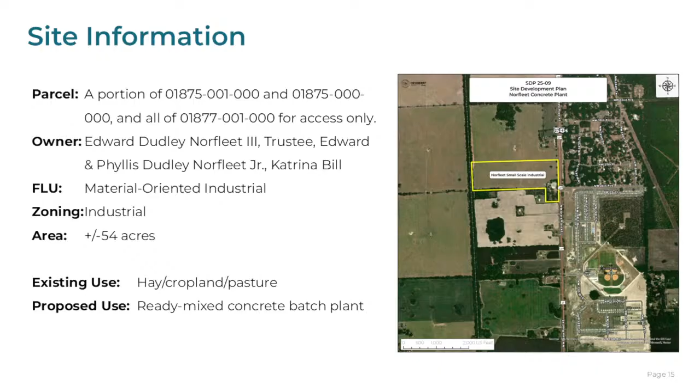This is the proposed site and development plan, where you can see they're accessing the site on an existing driveway from US 27/41. And that's in the FDOT right of way, so future permitting and possibly requirements from FDOT will be forthcoming. In discussions on this project, aligning it with 24th Avenue was a no-go per the engineer of record.

Because of misalignment of those and the existing building preventing a road from being constructed in that particular area. And the separation between existing driveways may not be possible, given they were going to be so close to each other.

Here's a close-up of the actual operation of the property. I just want to go back to this one real quick. You can see that there's a future subdivision that is proposed for the area that'll be forthcoming in the form of a plat, but at this time, we're not requiring platting for them to proceed with the site plan.

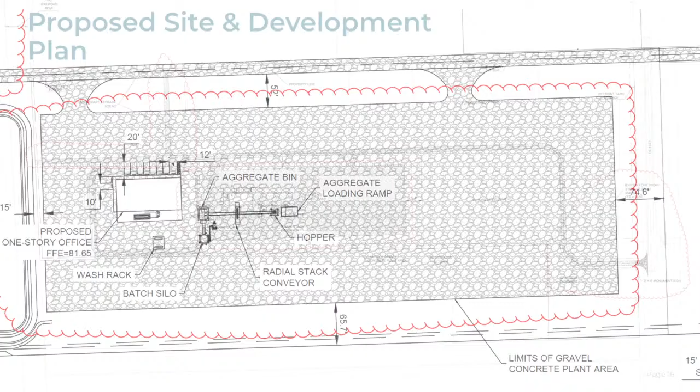So very remarkably similar, the vehicles will come in, they will fill up. There's a drainage pit, there's an aggregate area I want to show on this one to the northwest, which is going to be pretty open, kind of similar or remarkably similar to the Watson property in 41 Commerce right now, where there'll be aggregate openly stored.

The site is all gravel, including the road. There's a condition that addresses this. That interior access road should be a paved road, but because they're anticipating water and sewer becoming available to the site soon, we've just pushed off that requirement to a later time when they have an opportunity to install those water and wastewater lines, so they're not paving and then demoing and then paving again. As a matter of sequence of construction, it just is more affordable and logical.

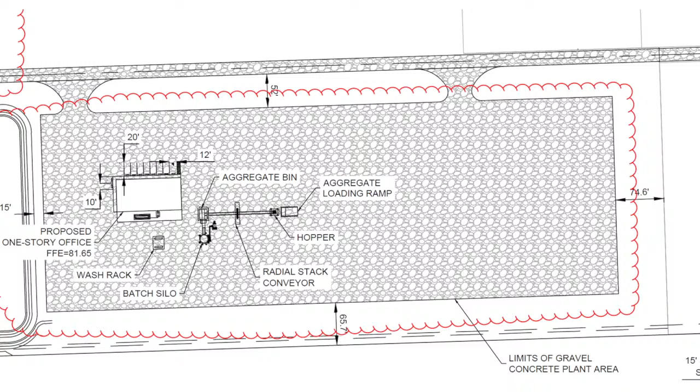Just wanted to show the existing driveway and some of the turning movements that were occurring there. And you can see some of the right-ins, the right-outs potentially, and then the passive lefts that would be occurring in that particular area could lead to a little confusion. We'll lean on FDOT District 2 to work out any bugs that they see in their right-of-way as far as traffic goes. Staff did find it consistent with the comprehensive plan, land development regulations, and the approved special use permit.

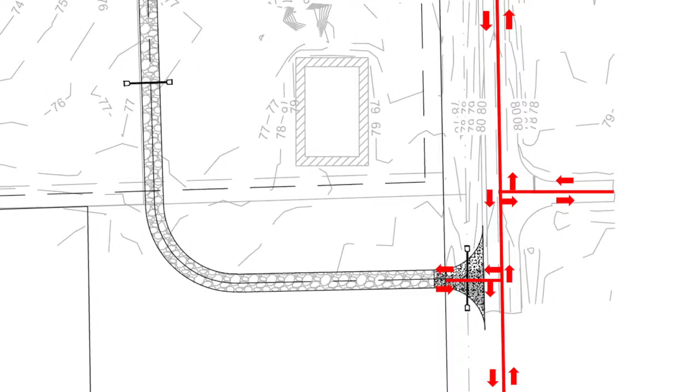We are recommending approval with the conditions you see on the screen here. I'm available for any questions. If you have any, the applicant hasn't prepared a presentation. They are here as well to answer any questions you may have. Thank you. Okay, the applicant does not have one? Is that what you said? Okay, all right, very good.

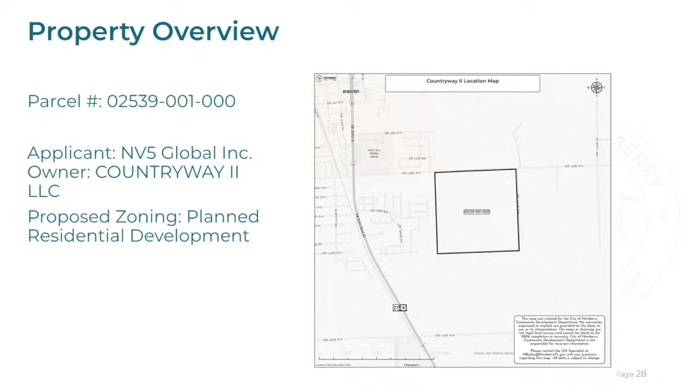Staff finds this petition is consistent with the comp plan and land development regulations. Overview of the request: it's a rezoning from agricultural to planned residential development. The property is generally located at the southwest corner of Southwest 15th Avenue and Southwest 234th Terrace, about a half mile east of State Road 45. Here's the general area, and that's the parcel number. The applicant is NV5, owner is Countryway 2 LLC. The proposed zoning is planned residential development, and the current zoning is agricultural.

Again, the question to consider is whether the petition is consistent with the city's comprehensive plan and land development regulations. If yes, the PZB could approve the petition. If no, deny the petition, or you could continue to a date and time certain if more information is required. The applicant is here to present also.

Okay, Chris, you presenting? Oh, Jerry. Oh, you're in NV5, that's right. Okay, I'll see if I can make this work. Okay, that's how I get the pointer. All right, I'll take my cues from JP.

Good evening, Mr. Mayor, members of the Planning and Zoning Board, Madam Attorney, Mr. Manager. My name is Gerry Dedenbach. I am an AICP certified planner, have been for about 30 years now, and I am here to present a quasi-judicial item, the rezoning of what we're calling Countryway 2.

As you can see in the aerial on the screen, this is the quarter section immediately to the east of Countryway. There are some good tree lines here which influence our design, which you'll see brought forward into the PD master plan.

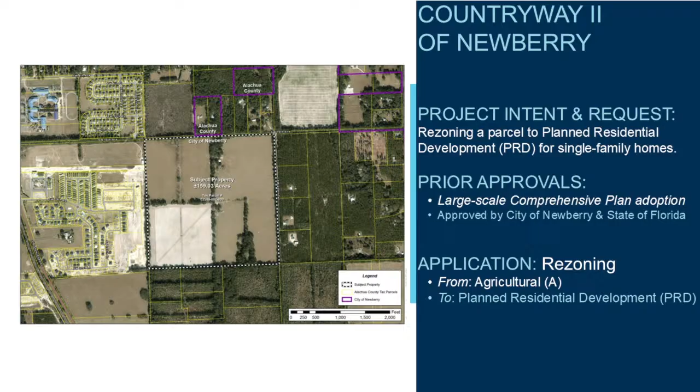That's interesting. Yeah, this just shows you nothing. There we go. Well, sort of, but that's not what's supposed to be happening. Maybe we need to reload the presentation.

Our process here, and we'll see if it gives us problems on future slides: we held a pre-application meeting in August of 2024. We submitted our applications right before Halloween, and these have been under staff review and resubmittal. We produced a traffic study, which caused a bit of delay, from October to February and then again February to April. We conducted a traffic study with a methodology approved by both the City of Newberry and the Florida Department of Transportation, because initially our primary connection is to State Road 45, 27/41 out there.

We are here tonight at the Planning and Zoning Board and anticipate hopefully going to the City Commission next month. Let's see what happens when I click further. Okay, yeah, we are having a PowerPoint meltdown here.

About 12 years to accomplish. The project will initially connect to the existing roadways, water, sewer, and utilities in Countryway. This is a logical extension of the existing development program. There's Countryway Town Center, and we will connect there. Therefore, the PD actually limits this property to a lower density than the land use allows. We did that because we want to save some tree lines and have that interconnection that works off the existing roadway network.

So this is overall master planned in the city's long-term framework. We know that they will be changing theirs. We supplied our plans to the engineers for Newberry Ridge on April 7th of last month. This is consistent with multiple elements in the future land use element, and you would see those if that was working right.

What's really striking me as odd, and I think it's in the Crestron system, because we do not have a City of Newberry logo embedded in our PowerPoint—so I think it's trying to project two things, and it's confused over what it's projecting.

The data and analysis completed with our comprehensive plan and our land development regulations, or LDR, that we've presented identifies numerous elements in the comprehensive plan that this application is consistent with. Staff has acknowledged in the staff report that each phase of this development, as presented in the petition, represents varying degrees of impact on state services. We have planned for all that, as you can see in the overall connection scheme of this project.

A development agreement will be negotiated between the city and the applicant prior to final development here. It is consistent with the zoning regulations of the City of Newberry, specifically Article 4, Section 420, and again in the zoning regulations, Section 4.2.24. So our request is that you respectfully approve this, per the staff report and our competent substantial evidence presented in both the applications, our presentation, the applicant's presentation, and the subject matter testimony provided to you this evening. And now it's back to our presentation.

You've got phase one to go through an infrastructure design, so I would think probably Q4 27, Q1 2028 to start. The phases, phase one, I feel like I'm at a seance here with this. Yes, phase, yeah, Vanna White this for you. You got to point it at what you want to advance. Oh no, I want the arrow so the mayor doesn't have to Vanna White this.

Okay, you had asked about the perimeter buffer. This is helpful. As you can see to the south here, the buffer is thicker in areas where the vegetation exists, and along that area shown on the aerials, because there are going to be stormwater basins there. So that buffer is thicker along the south side than the east side, because here we're going to dedicate 60 feet of right-of-way, so there's really no buffer, but it will be the back of lots that are there. Along the north side, I believe we have a 25-foot buffer to the right-of-way of 15th. And there is some buffer here along the western side, but also these areas are stormwater basins. So there's already buffering built in here, and there is buffer along that edge, but there's a good distance between the stormwater basins and where the tree line would be here.

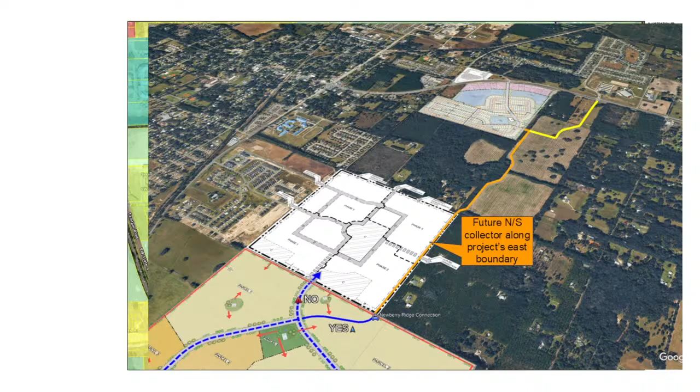Okay, with that, any comments, questions from the dais? Going to keep traffic off of 15. Hold on, you got to come up to the podium to ask any questions if you want. Okay. And any members of the board have any questions for staff or the applicant? Okay, I was going in line.

I did have a clarification question that I ran by staff and they asked me to ask as well. When I was reading through the overview, I see there's a reduced dwellings per acre of less than 4 for low density, but within the proposal there are obviously smaller homes, tiny homes. I know in the other development, Countryway 1, there's already an existing one, closer to phase 3, if I'm correct? Right here, right. So is phase 3 going to be where the proposal of additional tiny homes flows from Countryway 1 to 2? I'm trying to think of the flow here, so that it all looks synonymous. I love the mix of it, I just wanted to get an idea visually. I'm not going to hold you to it, I know the PRD isn't complete, but I wanted an idea.

Yeah, if we do the tiny homes, and I don't know if we're going to do them, it would be in that same area. That was the only reason you were asking for the shortage from 10 feet to 3 feet, correct? Right, that's the only reason. So it would be kind of continuous with it, correct.

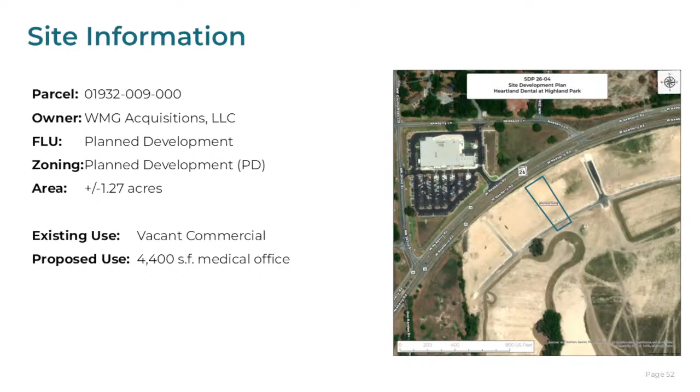Thank you. Here you can see some of the developments that have been brought before the board, as well as some of those coming tonight, and McDonald's in the future that's currently in process. In yellow is the Heartland Dental.

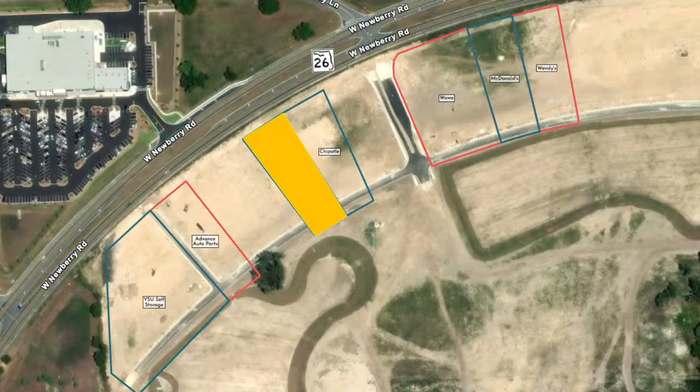All right, and here's the actual site plan. They utilize the cross-access. Heartland Dental is on the left side of this. There's a lot of call-outs on the right. Both parcels are owned by WMG Acquisitions, and so both utilize the same firm. They kind of design these sites in unison so that they could shoulder some of the ingress and egress and other requirements that sites have to do since they're a single owner currently.

Heartland Dental is on the left-hand side here, right there. They have cross-access in the front, but the primary access will be in the rear for the time being. Both of these will be built out. They do share an ingress and egress off that back service road currently, and as all the parcels fill out, the eventual cross-access across all the parcels will become universally available from the primary ingress egress drives.

Not much else on this particular site plan. Again, they will access here. They have a dumpster in the rear towards the service side of the building, and then the office building with parking all around it. It does meet the overlay standards.

The overlay standards applied in this particular case are the ones adopted by the commission initially. Given the date of this and the progress they had made up until this point, they had kind of cemented in the old overlay standards, which are still very robust when it comes to landscaping and whatnot. In the front, they'll have a 15-foot landscape buffer opposed to a 25-foot. There are certain other things added in the large-scale retail package that aren't considered here, like the limitation on building height, et cetera. So they still only need to meet the commercial intensive height requirement, which is 72 feet.

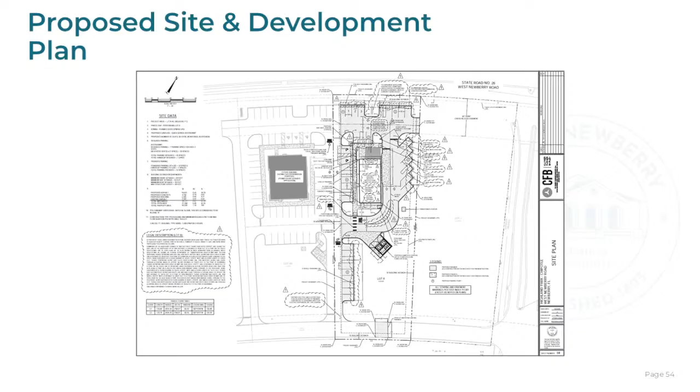It's, yeah, but this is a one-story building, so neither here nor there. We did find it consistent with the comprehensive plan and land development regulations. A KnoxBox is required for this particular use. There are some additional infrastructure callouts here that will be addressed on the building permit, but are inconsequential to the actual site layout.

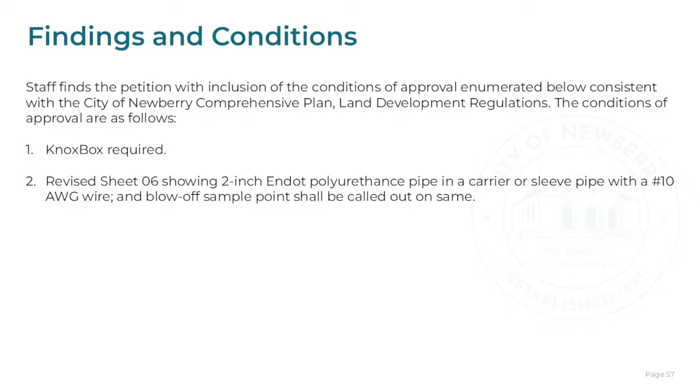One other thing I'll advise the board in case it comes up in public comment is that based on how many people are unconscious at a single time, it may change some licensing requirements with the fire department, but the fire chief gave it his blessing. It's good to go there. He was very happy with the plan. That completes my presentation. The applicant is here to answer any technical questions you may have.

Thank you guys so much. Do we have some of the elevation stuff for Heartland? For the public, we have it in the backup. I can tell you that it did satisfy the overlay standards as far as design and materials and glazing. They did provide a pretty robust design package utilizing multiple materials. They're here if anybody from the public needs to check them out. They were in our backup, but just want to make that available to you all if you need it for any reason. Everybody from the board, you saw that in the backup? Okay.

Okay. Did the applicant's not here, correct? Yes, they are. Oh, great. Hey, did you have a presentation or no? Yes, sir. You don't like us?

The only question I had was in one of the documents, there was construction staging, which I assume, since I know it's the same owner for both properties, is for both properties during that time, right? And it's going to go all green space afterwards? Yes, ma'am. Is that going to be used for the water management? Like, is it going to be a basin there?

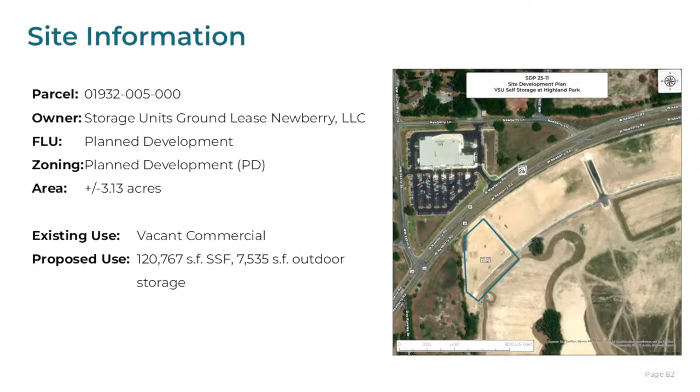The big mustard colored one is the site, so you can see its orientation within Highland Park. Here is the site plan showing the location of the buildings, the flow of traffic, the parking, and ultimate connection to the south. This does have that cross-access easement along the front and the landscape buffer, which will be 15 feet across the front as well. Generally, that is kind of like a one-way, except for the parking in the front driveway.

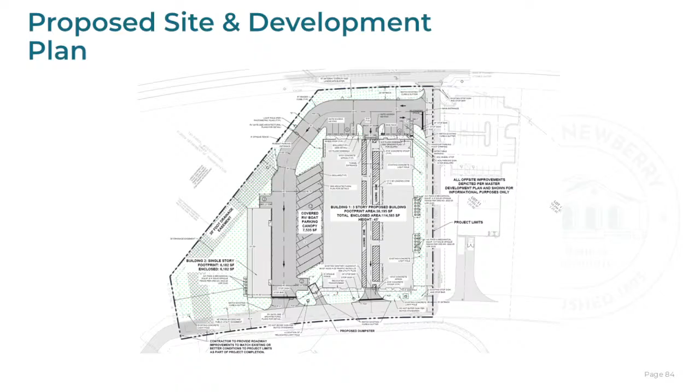We don't have one of these here, but they are pretty prevalent in urban areas. They'll have a drive-through in the center of the building on the ground floor that'll provide access to elevators that folks can take up to the other stories. It'll be an entirely air-conditioned self-storage unit for the primary building, and likely the detached building as well.

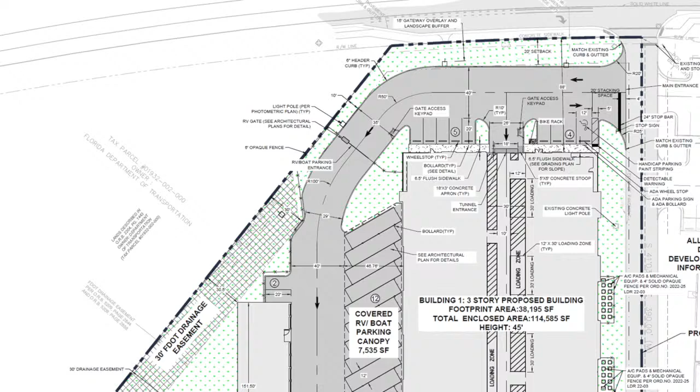It is gated. They have screening for the one-story and covered storage portion, that's provided as an extension of that gate there, so it'll all be screened. And here you can see the rear of the site where it accesses the service road, and that interior to the building traffic will dump out onto the service road, as well as that drive around the building.

In the red square that's dashed are the condenser units outside, very large building, a lot of pounds per square feet going on inside there. So they have many, many AC condenser units on the exterior, which we'll get some screening on, so they're not facing the street as you drive by.

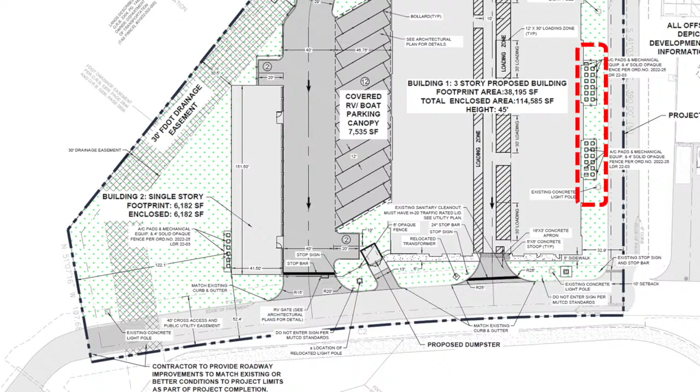That completes my presentation. We find it consistent with the comp plan, the land development regulations, and the PD approval. We are recommending that one condition for the landscaping. This is just a summarized version of the actual language. I'm available for any questions if you have them.

Okay, applicant's here with a presentation as well, so let's not get too comfortable yet. And that's the beginning of their presentation there. Thank you. Thanks, sir.

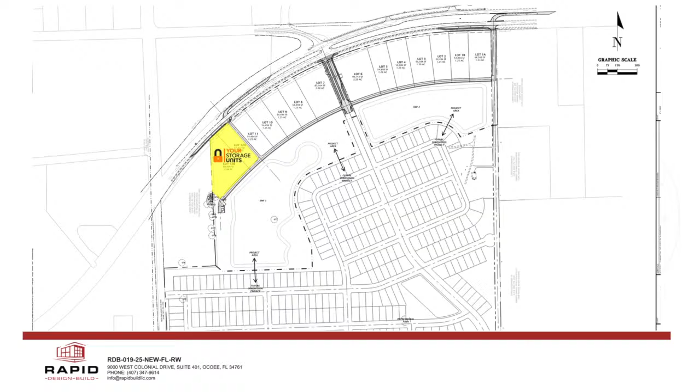Here's a depiction of the parcel here in yellow, located within the master development. We had the site plan that John Paul just went through, depicting the 114,000 and some change storage building with the interior drive aisle exiting to the south, as well as flanking to the western portion of the property, the one-story, just over 6,000 square foot storage building.

We also have covered RV and boat parking and storage. The main access will come off of the north-south interior roadway here, enter into the property, and if you're visiting the large storage facility, you can enter in here, find the loading zone, offload your equipment, and then exit to the south.

There will also be another access way flanking the western portion of the property. There'll be a Knox box gate in this location, kind of where this dimension is, and then they'll be able to exit to the south as well.

The parcel has been master planned for both stormwater, water, and sewer utilities. We will be tying into those existing stubs from the master developer.

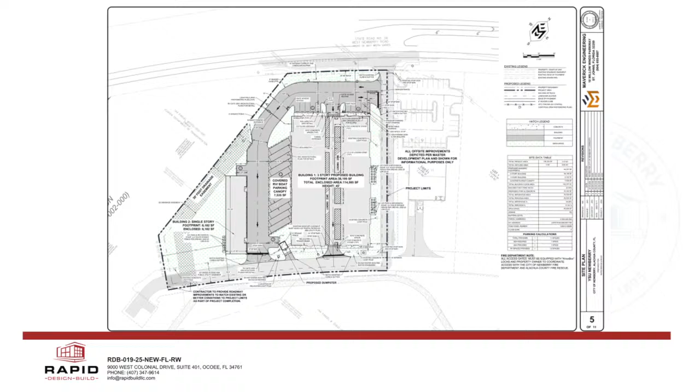Outside of that, the next slide will depict the landscape plan. We're depicting Florida native friendly vegetation flanking the outside of the property, as well as the interior parking islands. We did talk to John Paul about adding the landscaping around the condenser units. We're perfectly okay with that. We'll be taking care of that as well.

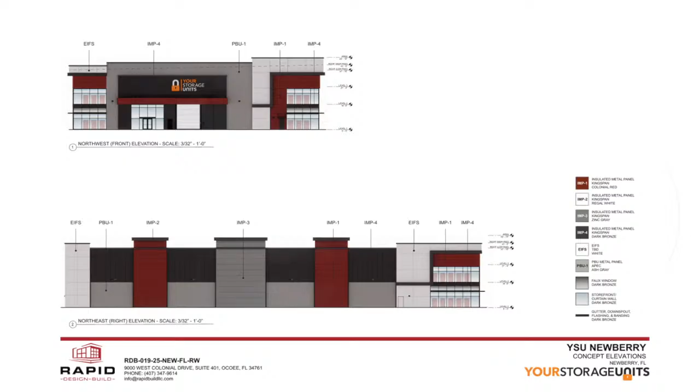So the materials that we're using on the building are insulated metal panels. If you look at these line works here, those are insulated metal panels. They do also have a stucco finish, so it does give the building a stucco look. And then we also have a mix of other materials included here, EIFS for example, and then a little bit of metal panels elsewhere forming the base to kind of give a human scale to the building.

All right, so this is the rear of the building. Coming out of the exit side, we do have a portal that we like to include on our building to invite people in and to let them know exactly how you access and enter the building.

On the southwest side here, we carry through that same look and feel with the insulated metal panels, a nice mixture of materials on the building, and then also we have our display windows that we typically like to show.

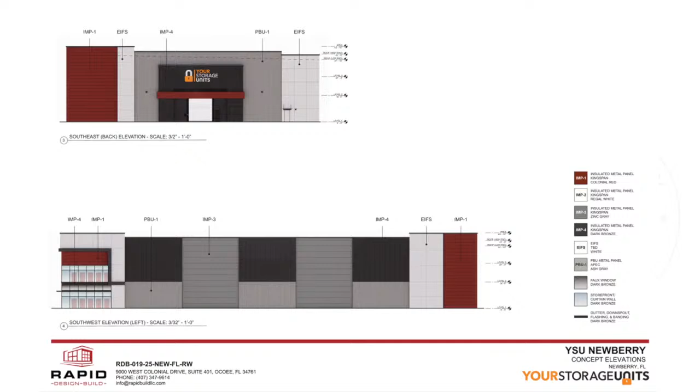Shane, I'm sorry—this is the side where the RV storage will be, right? Correct. So we won't really see much of that necessarily. You'll see a canopy. The RV is actually not enclosed, so you will see the frame and the structure for the canopy. Okay, and then obviously if there's vehicles there, you wouldn't see that side there.

All right, and then this is the smaller storage building. This one is a little bit more traditional in terms of the look and feel. However, this building is fully screened. It's behind a 6-foot CMU wall and the gates that Jeremy presented earlier. So on the front side of this building, we do have those walk-up storage units, but you can also go all the way inside, and then you'll have interior climate-controlled storage units on the interior of the building.

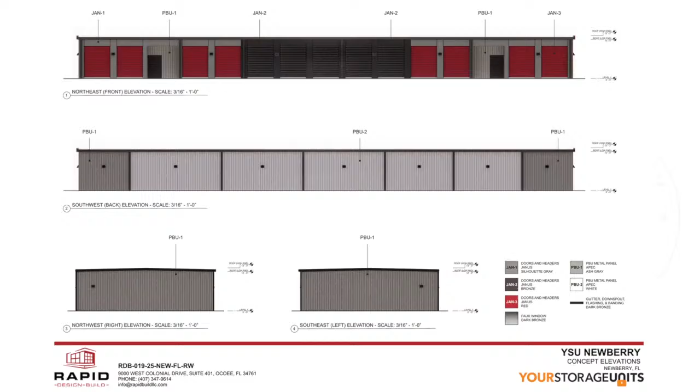So we prepared a couple of rendering shots for you just to have a better understanding of what the building is going to look like in the end.

We do it that way for a couple of reasons. It's a climate controlled facility, so we don't want to leave that door up all the time. We also like to maintain this closed look so you're not looking inside while people are loading and unloading. Is there a walkway in there where people could be looking out? No, it's just a display corridor, locked on the inside, so no one will be able to accidentally walk into that corridor.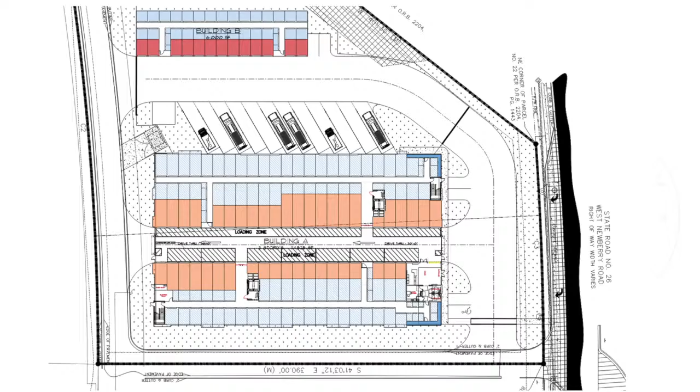I can't see it, you can see the height there but it's too small for me to see. What does it say? I'm trying to read, so it's about 110 to 126, so 16 feet. I guessed at 15. So there you go, right on the money.

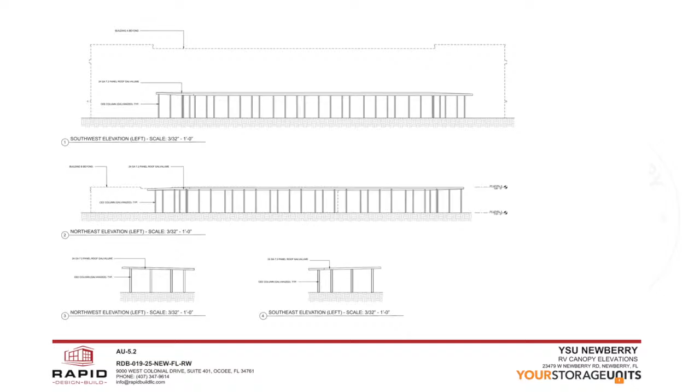All right, and then we did provide additional details for our trash enclosure screening as well. This one is just an example of one of our existing facilities, so you can have a better understanding of what the materials might look like at the end.

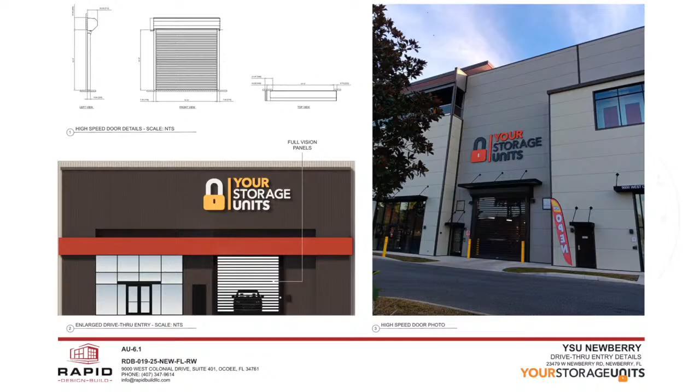This is the high-speed door that we talked about here, and we construct our facilities primarily with insulated metal panels. And this is our screening sidewall.

All right, this is just a photometric study that we did to make sure we don't have any light bleed outside the perimeter of our property. And all the fixtures that we specify for the project are dark sky compliant, so we made sure to include that documentation for you as well.

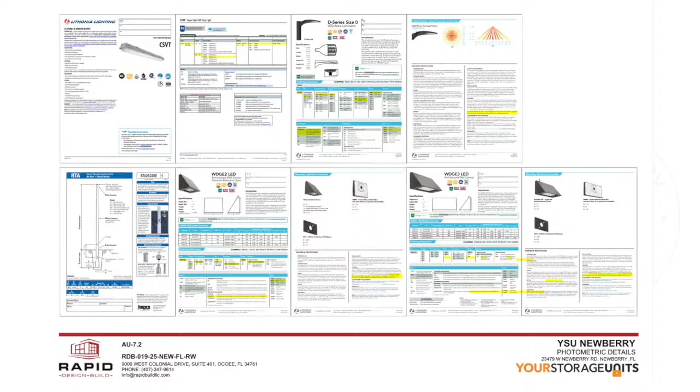And then the last thing we mentioned was we do provide a Knox box for both the gate and for accessing the actual drive-through itself. And that's it. Great.

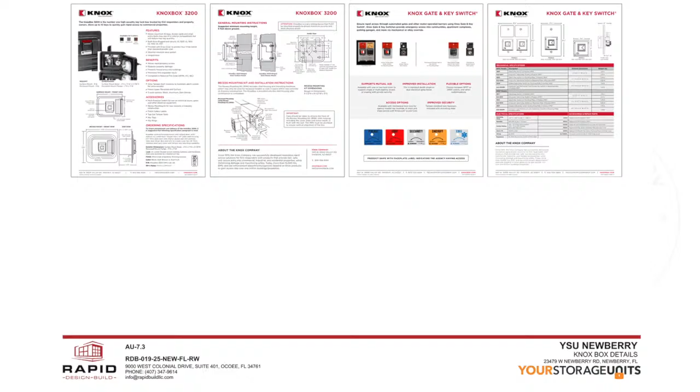Okay, we'll bring it back to the board. Does anybody from the board have a question of the applicant and/or staff? I have comments, not questions. I already asked my question and got the answer, which was related to the height of the building.

So you guys obviously applied before we did any regulations on it. Our new height regulation is 42 feet and you're at 45. I know you're thinking, come on, lady, you're picking at me for like 3 feet, but I'm looking at the overall appearance of that and it being... may I interrupt you real quick?

Yes. So the actual height of the building is 41 feet. The parapet goes up to 45 feet.

When we're actually measuring the height of the building, it'll be to the roof line, which is 41 feet, and then they're allowed a projection above and beyond that, which is what the parapet is. So that's where you're seeing the 45 feet. It still complies, even though they don't have to, with the new requirements, keeping it below the 42.

Okay, alright. Look, I'm learning something else. See those numbers there, that was a fun question. Yeah, yeah, look at that. There, I guess that's kind of what I wanted.

Again, it's just comments. We have a lot of storage units in the area, quite a few of those. I know I can't make my decision based off of this, but I'm just going to give some feedback. This thing is going to be massive in comparison to all these one stories on the strip, and I think it's going to be quite an eyesore to look at. With everything else around it and what that looks like, you're going to do what you're going to do, and I can't legally say no to you. So that's just my feedback. I think this is going to stick out and just not fit in with everything else going on. Who knows what's coming, but that's just my opinion.

Ms. Thomas, do you have anything? Ms. Carey? I had a question and then a comment as well to piggyback off of Melina.

My question was regarding, I see that the overlay is a lot bigger than 15 feet because of the stormwater management on the southwest side, I'm assuming. I'm trying to go direction correct because it's going down. So obviously with the stormwater there, the way of the projections of the trees, are there going to be significantly more trees there? Because with a 6-foot fence and a 10 to 11-foot building with that one strip that's across from the RV building number 2, I want to make sure that that's hidden. The reason why I'm saying that is the way that you're driving through and coming around the corner, that's the first thing you're going to see on top of the 2-story building. You only see 2 stories there because it's high units.

So my concern is, is that going to be more lush? And if there's anything, possibly making it more of a condition to do that so that it's not as an eyesore, as you said. And is the fence that's going around, is that also metal, or is that a brick fence that's going around that backside? That was my question.

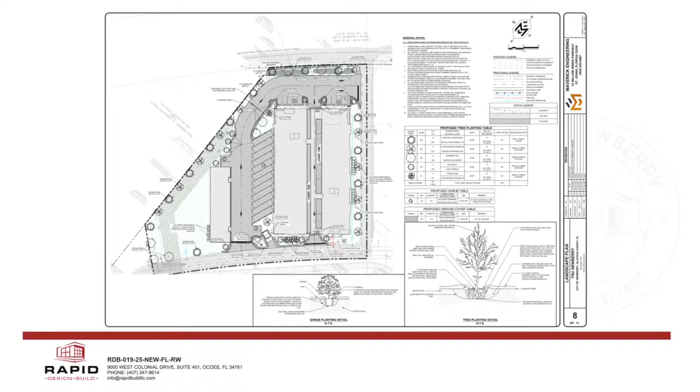I do agree that we may not need an immediate need, but considering the growth of our community, this is probably going to be a necessity, especially with the number of homes going in Highland Park and the other communities that are being built. The other one is further down the road, and the other one is on the other south side of town. I shouldn't say south side, east side of town, going towards Trenton.

So my question is, because I know this is coming up in commission meetings, so this isn't really relevant to this, but have they already been made aware of the fire assessment and how it works for overhangings as well as buildings? Do you know what I'm talking about? It's come up like 3 times in 3 past meetings, every time we have fire assessment, so I just want to make sure that that's noted. We try to prepare them for as much as we can.

Fire assessments aren't on that list, but we can start doing so if the board desires. I don't want us to be the ones who get complaints later, because under state law, overhangs like the RV parking are counted as square footage for the fire assessment. In this case, they should be aware that's usable, taxable space. However, the open air part is actually accounted for in the fire assessment, so we were able to clarify that this past year.

Oh, that's wonderful, so I won't have to hear that at the next budget meeting. Let me recap: there is a fire assessment, but it's calculated at a different rate. Okay, fair enough. I know that was always a big thing for our other storage communities, and I just didn't want there to be an echo for the third company coming in. That's the only reason I mentioned it.